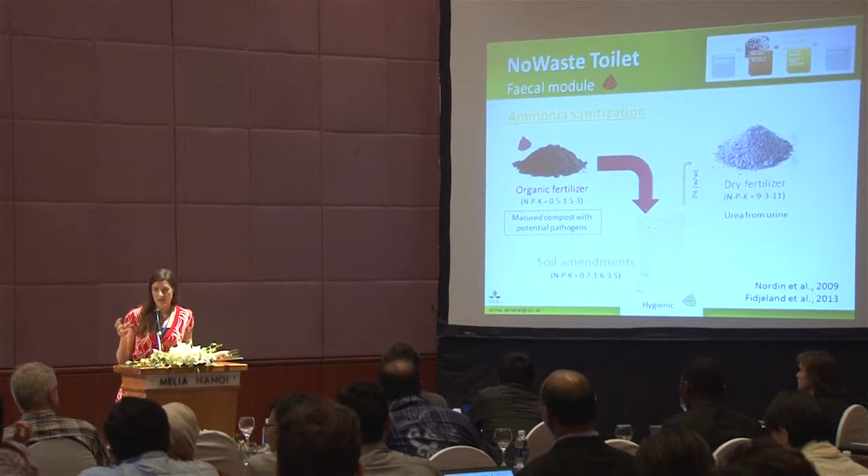So we would like to use ammonia sanitization as a post-treatment to ensure that all pathogens are eliminated. Ammonia sanitization is a technique that my colleague Annika Nordin explained yesterday. And by mixing in 3% weight for weight of our dry fertilizer, the remaining enzymes still in the vermicomposted material hydrolyze the urea into ammonia, and then we're able to sanitize this to get a hygienic output.

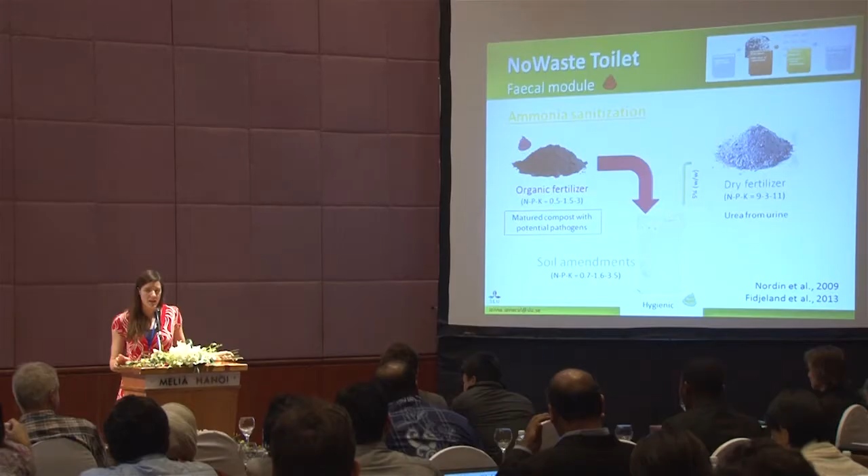Conceptually, this is how the toilet would come together. There's no need for big infrastructure or for deep holes. It can be a standalone unit itself or be implemented in existing households. The idea is that the urine diverting sieve would collect the urine, and the urine would pass directly through the ion exchanger so that there's no time for the hydrolysis to happen, and then pass into the dehydration module. And again, the feces will fall down directly into the vermicomposting bin.

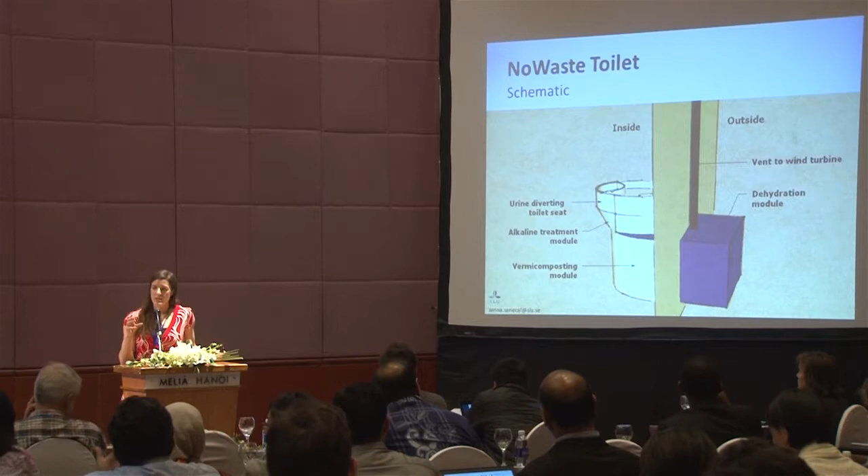This unit would be connected to a powerful fan so that we have enough evaporation rate happening, and be connected to the toilet so that there's a negative pressure so that the smell is taken out. For maintenance, the ion exchanger for a family of 5 would need to be regenerated once a week, and this is done with some hydroxide solutions such as sodium hydroxide. The dehydration module would need changing every 2 months, and the vermicomposting would need to be changed once a year. The estimated cost for the materials to maintain this toilet is about $30 per year.

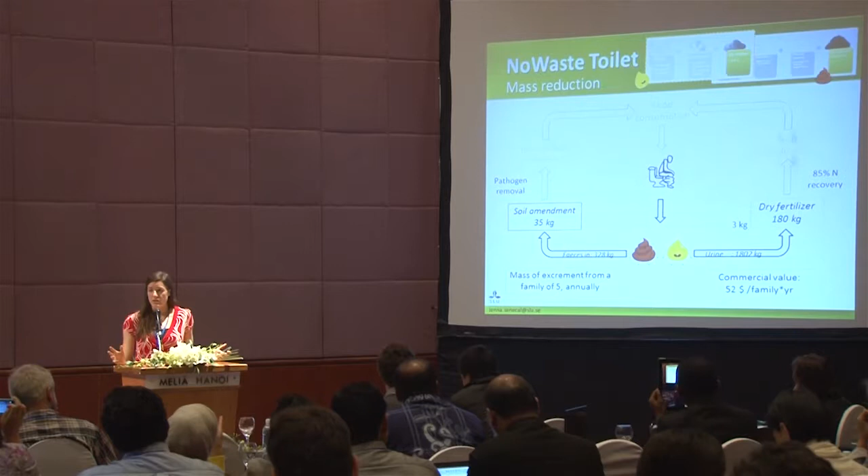Coming back to what this toilet is actually able to achieve, for the urine, we have about 1,800 kilograms coming in annually for a family of 5, and we're able to reduce this to 180 kilograms to produce a dry fertilizer while recuperating 85% of the nitrogen. For the feces, we have approximately 330 kilograms, which we're able to reduce to 35 kilograms, including the dry fertilizer being added to it for the ammonia sanitization.

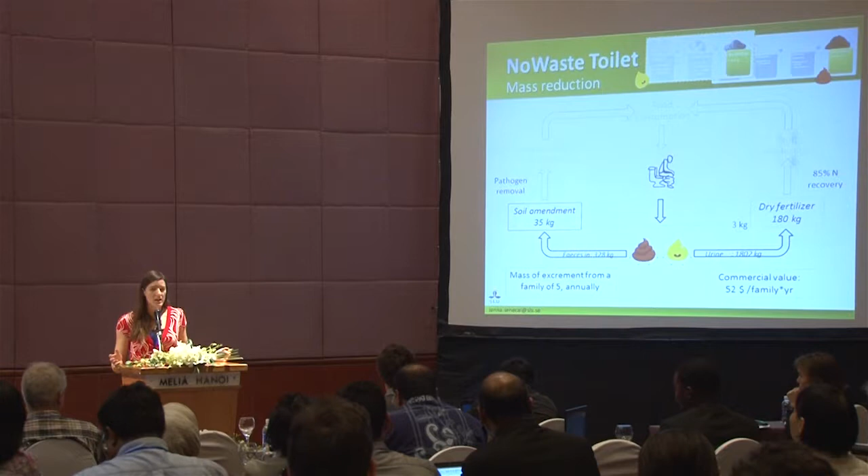So the exciting part is that we don't need a pump truck. We don't need big machinery to dig holes or to get in and empty it. The mass is reduced by 90% into manageable volumes that people can then handle. And a really important aspect is that the pathogens are minimized so that we don't have the spread of disease.

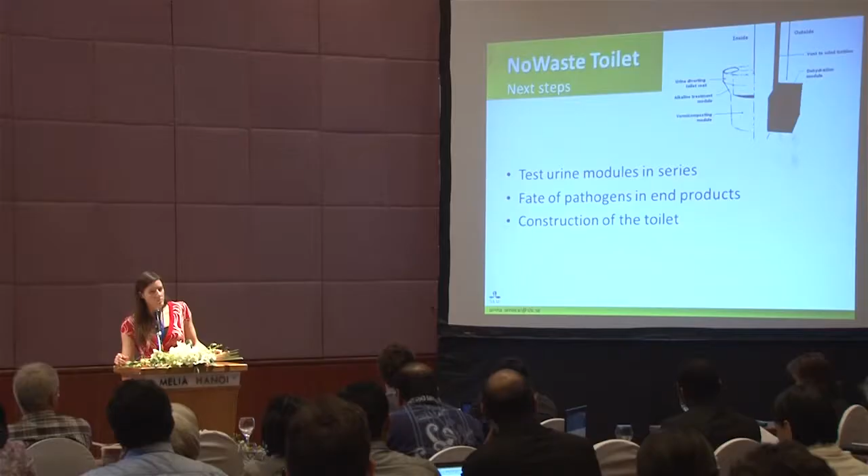Next, for my thesis work, I'll be testing the alkaline and dehydration module in series, and also be looking at the fate of pathogens in the end product. And this summer we will be installing 2 of these units in Sweden as a trial period. As we're still in the development phase of this, I'm very much looking forward to hearing your comments and thoughts, and thank you very much.

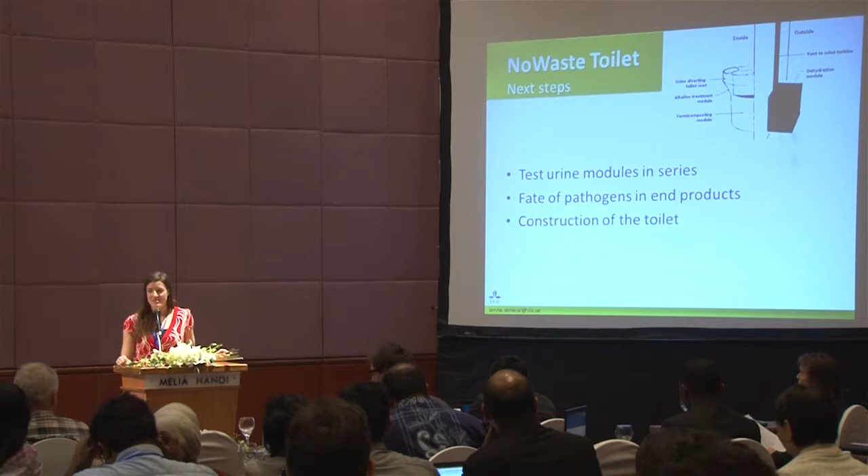Thank you very much, Jenna, for sticking to the time. Very good. So we've got about 5 minutes for some questions.

Thank you. This is a very interesting presentation. I'm Nina from Indonesia. My question is, how large is the risk from the feces of people who got sick before? And second, what kind of agriculture or plant can be used for this fertilizer? Because I think if it's vegetable or fruit, maybe it can be a little bit less to use this fertilizer.

Okay, thank you. Yeah, so obviously if there's diarrhea into the toilet, there's risk that the pathogens are still there after the vermicomposting, which is why we do the ammonia sanitization afterwards to make sure that all pathogens are eliminated. And for the fertilizer, and which crops it can be applied to, I will be testing it, but we're pretty confident that we're able to eliminate the pathogens so that it should not pose a risk for spreading disease while being spread on the field. But I will verify this summer to make sure.

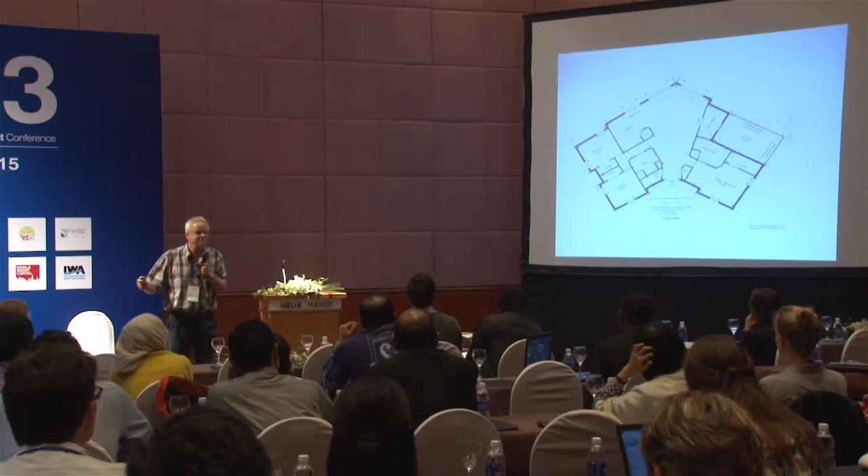And then the comfortable things we all feel: plans, the ventilated improved pit that Peter Morgan developed. Technically inventive. We're going to get rid of the flies, they're going to fly up the vent pipe, it's going to remove the smell. People are going to shit in it. What he didn't think about was that to make it work, it had to have a very dark compartment. And if you look at all the VIPs, the first thing people do is make them light.

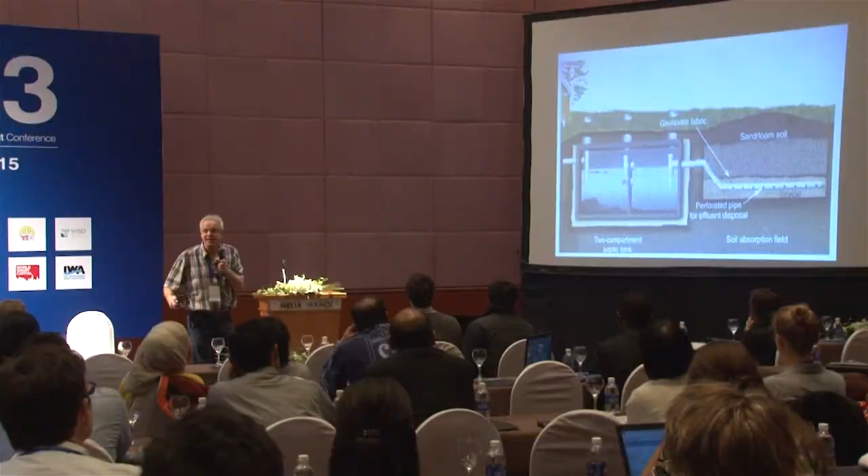Septic tanks. Once again, something that the engineers have. We've had quite a lot of discussion on this one. So when you look at these behavioural considerations, these seem to be cross-cultural. They don't seem to vary too much from South America into India and Africa. Solid walls, we need a good roof. Strong floor which doesn't collapse. Door with locks, preferably both sides.

Squatters and sitters, the normal sort of things we go through, washers and wipers, you have to take those into consideration. Well-lit places, so people can see where they're going. Ventilation blocks in the wall. And on the back end, which is probably the bit we're looking at, repeatedly you get this sentence: we want permanence, we want durability. I'm not particularly bothered about its functioning. They don't really care whether it's a tiger worm eating the shit, or a black soldier fly, or it's anaerobic digestion. What they really want is for it to last a long time and not cost them any money.

And then we go to the reflective level of design. This is the slower design. This is what probably makes us human, our ability to reflect on our experiences and then apply those experiences to other situations in life. And this is where the self-image comes in. This is where the social norms come in. It wouldn't be right if I open defecated and everybody else was using the toilet. And the products like the mobile phone and the car, these are actually where we express and show our self-image to the outside world.

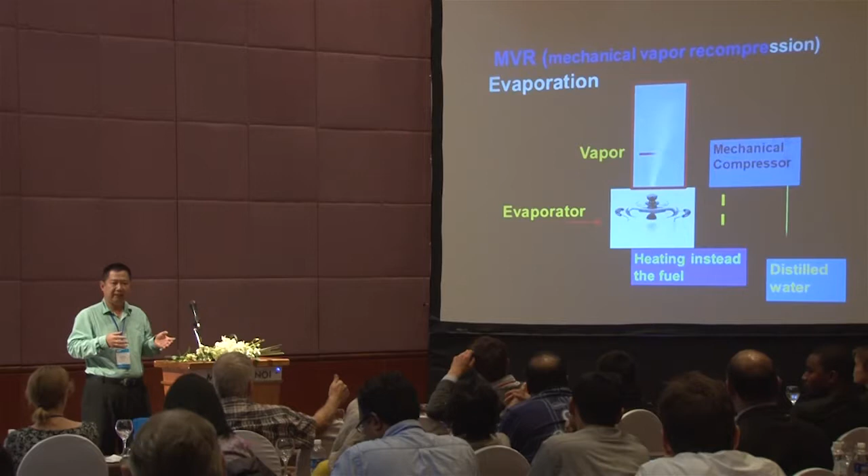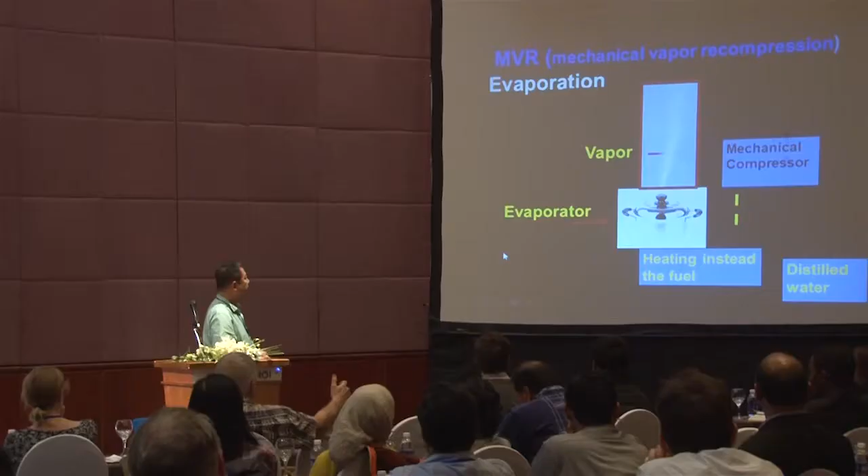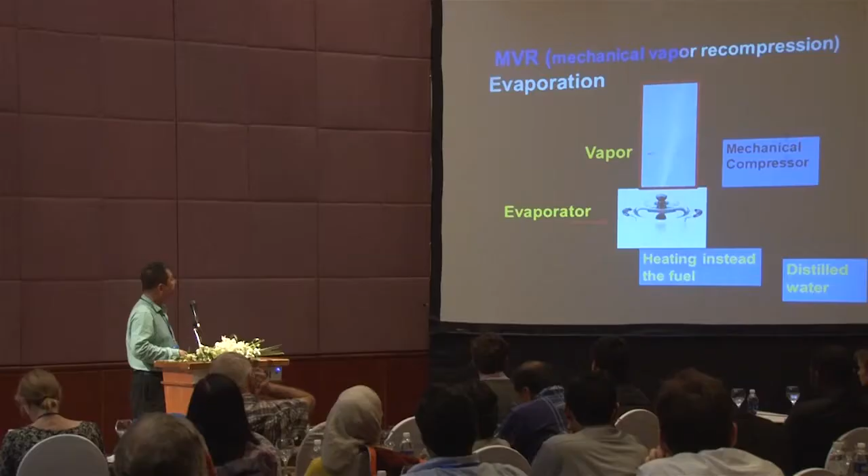This inner heat is used as the heating source. The heating source from the vapor replaces the previous heating source. It offers the heat energy. So this system saves a lot of energy. Generally speaking, MVR technology can save more than 90% of energy.

MVR is not a new technology. It's over 50 years old, but mostly used in heavy industries, for example, in distillation plants to get fresh water from the sea. Our job last year was to develop a low-cost, small-scale, small-sized MVR human waste processor.

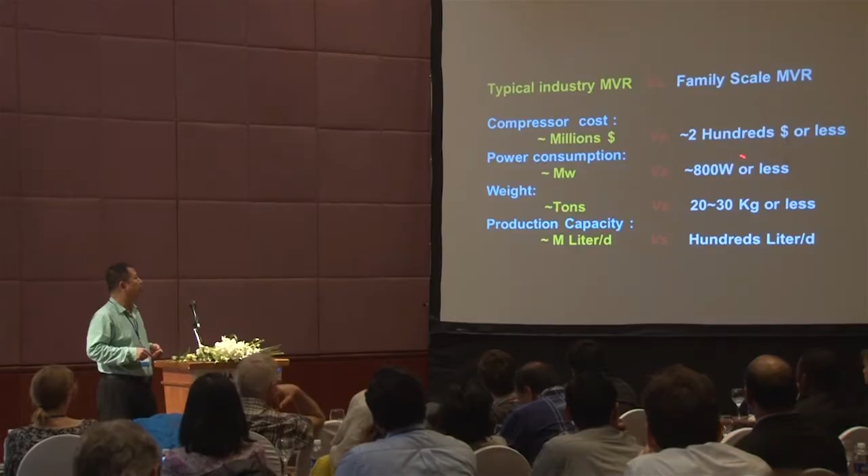The hardest part here is we could not find the correct compressor. The typical compressor is for industrial MVR, but there was no proper compressor in the market. So, very luckily, we succeeded on this and built a small MVR compressor. That's about $200, about 800 watts, and lightweight.

The second challenge is cleaning. You may have this experience: your kettle in the kitchen scales really easily, even just using clean water. So if you use black water or raw sewage, the system will very quickly stop working. So without proper measures, the system cannot work.

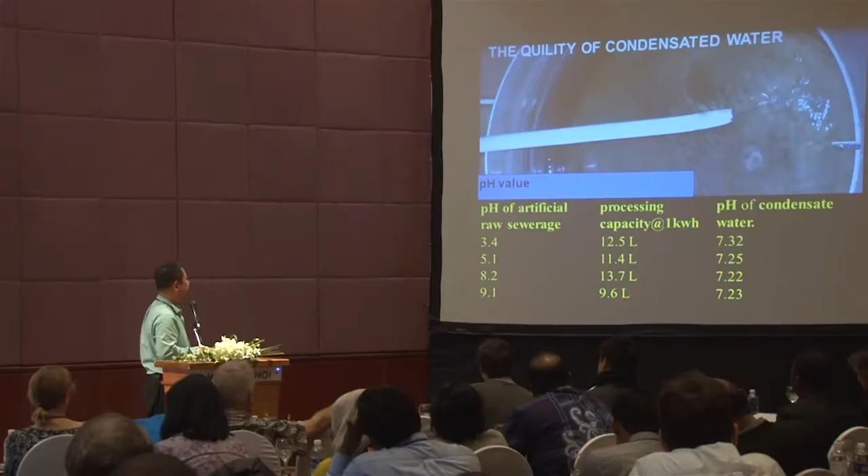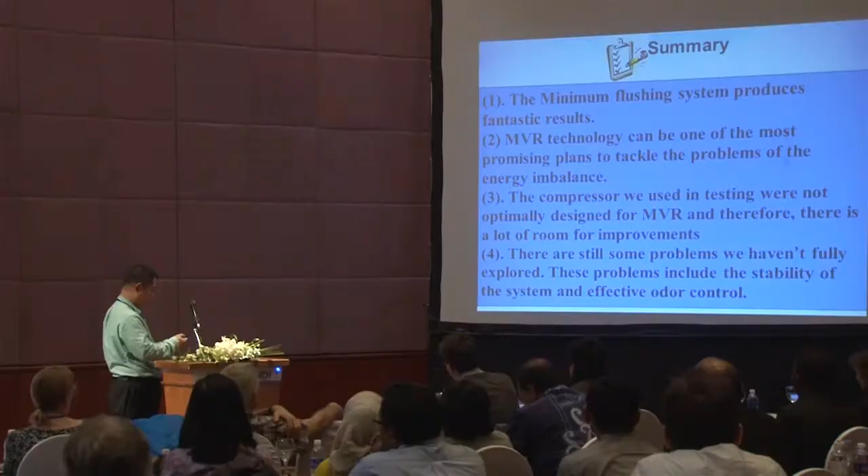Summary: the minimum flushing toilet is really fantastic. MVR technology is most promising, as it solves the problem of the energy imbalance. The compressor used in the MVR we built has a lot of room for improvement. So in the future, this compressor can be built smaller than this. There are still some problems we're working on, including how to control the odors and how to make the system stable, etc. Okay, that's all.

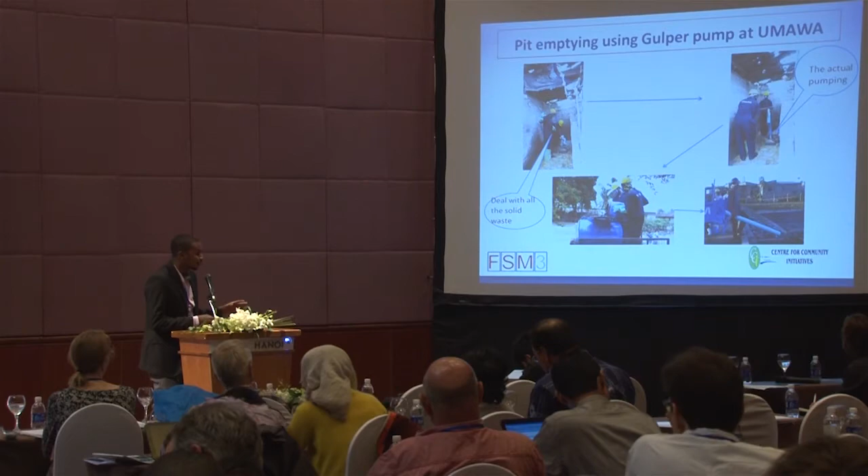So this is the actual process. With the pit emptying, with the Gulper, you first have to deal with the solid waste, because pits in the informal settlements, in most cases, are used not only as a pit but also as a dustbin. It's where they throw everything, pieces of paper, pieces of clothes. So it's hard for a Gulper pump to work. So you first deal with solid waste, then you do the actual pumping, you fill your tank, and then you go to the dumping station.

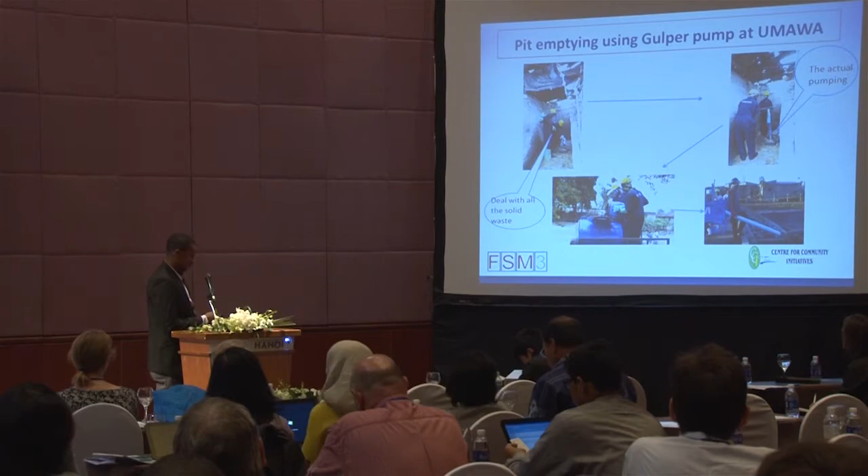So we're saying that the decentralized wastewater treatment system has helped to improve the group business by increasing the market niche. Previously, we used to sell only four trips, and now we're selling up to 8 trips a day. It has also increased the annual revenue. They used to collect about 1,200 USD, but now they're collecting up to 4,000 USD. That is between 2013 and 2014.

It has improved the services delivered by the group. Now they are proud. They can even take more of the cost now. Okay, we can provide service at any time. So the cost is a bit high, so they're making more money. But then they cut down the cost of operations. The cost caused by distance covered has been reduced from 300 USD to 30 USD per month.

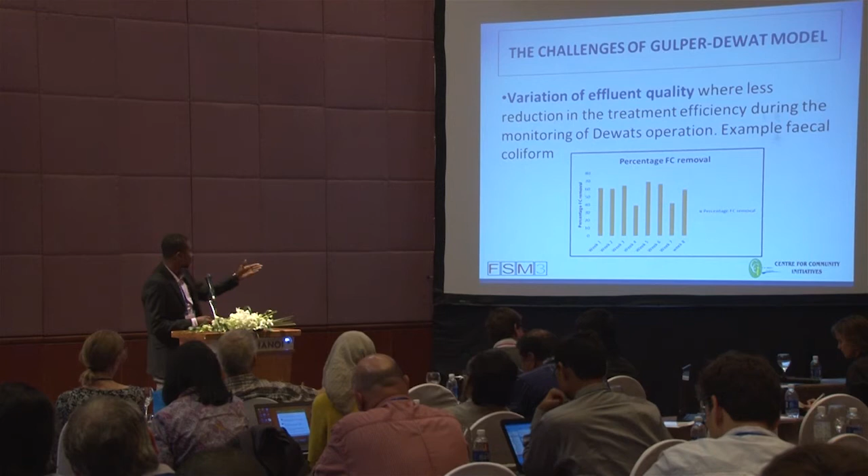And the challenge of this Gulper-Dewats model has been the variation in the effluent. This is an example of percentage removal of fecal coliform. As you see, it varies. Sometimes it drops to 8%. So there should be some improvement.

So what studies have been undertaken on how to improve Gulper? We are working with the CDO and other universities in local countries. They are looking into moving from manual to mechanized. Improve the quality of the effluent: we are now constructing a sand filter to make sure the quality of the effluent is good. Increase the number of business entrepreneurs interested, so we are promoting and mobilizing people.